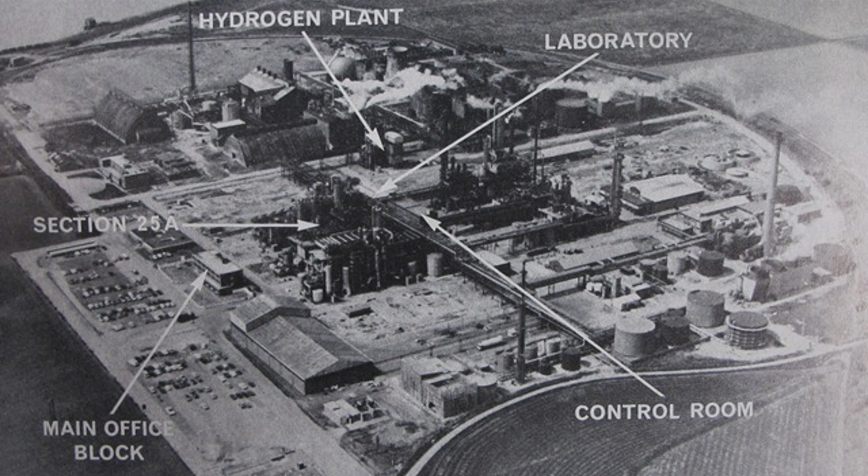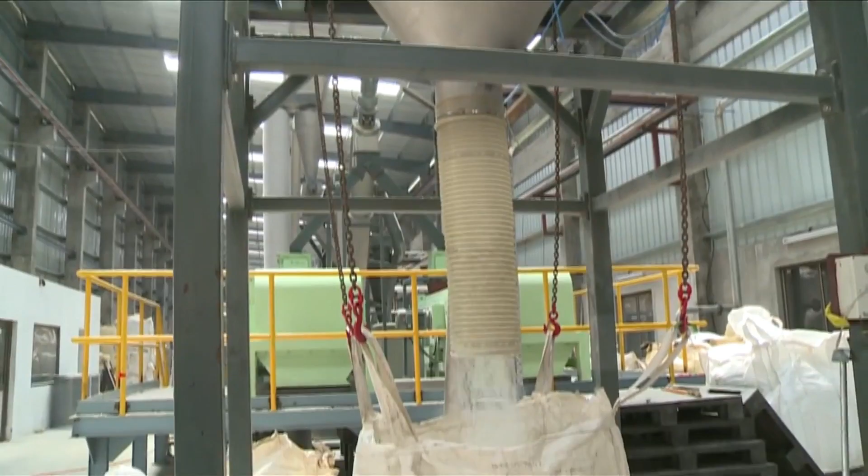A chemical plant had been on the site since 1938, originally owned by a company called Nitrogen Fertilisers Limited, a subsidiary of Fisons, and used to manufacture the fertiliser ammonium sulphate. In 1964, Nypro was formed, initially as a joint venture between Fisons and the Dutch Coal Board, but by the time of the accident, the Great Britain National Coal Board had also come on board, and the Dutch Coal Board had acquired Fisons' share. The chemical plant was reconfigured to produce caprolactam, one of the basic raw ingredients used for the production of nylon, and was the only plant in the United Kingdom to produce the material.

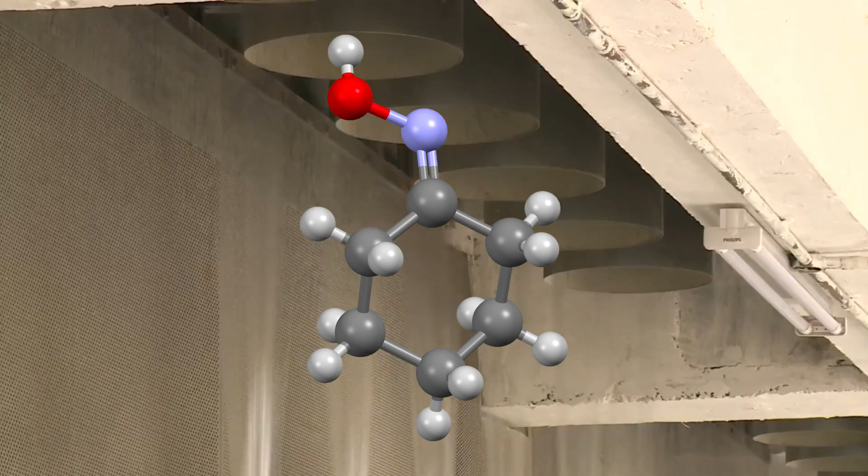The first stage of the process was the production of cyclohexanone, which was produced by the oxidation of cyclohexane, a highly flammable material in both liquid and vapour form.

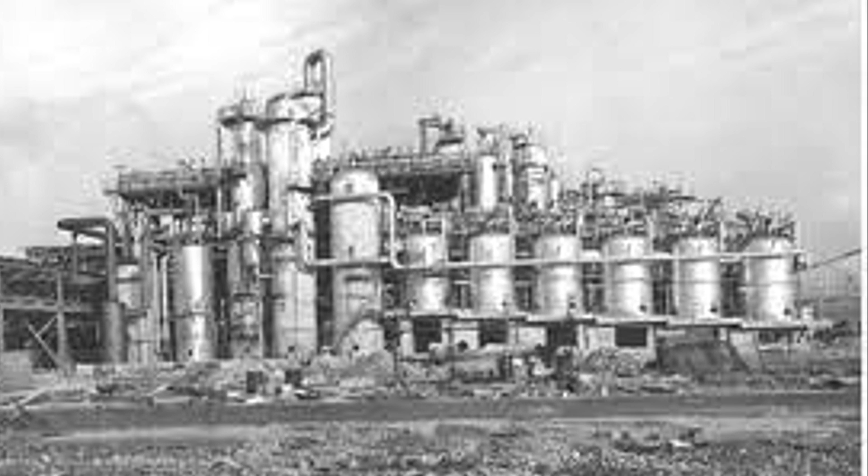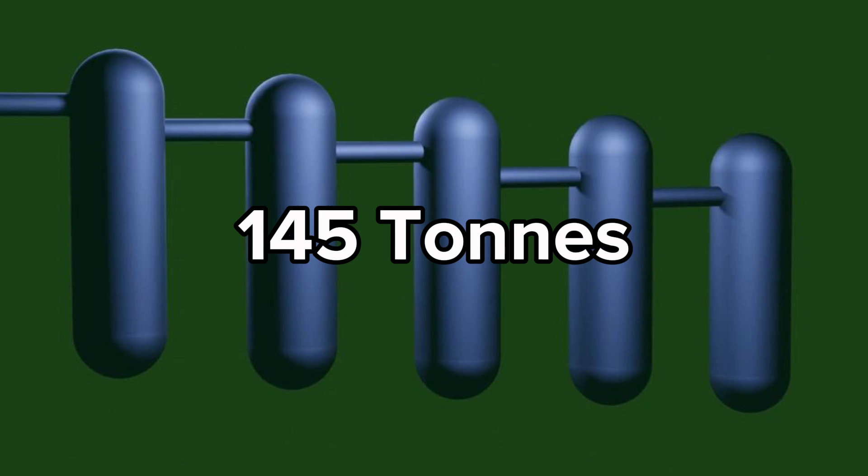The cyclohexane was heated to about 155 degrees centigrade before passing into a series of 6 reactors. The 6 reactors were each placed slightly lower than the previous to make use of gravity to assist with the flow of product through the reactors. The reactors were constructed from mild steel with a stainless steel lining, and when operating, they held in total about 145 tonnes of flammable liquid and a working pressure of 125 pounds per square inch.

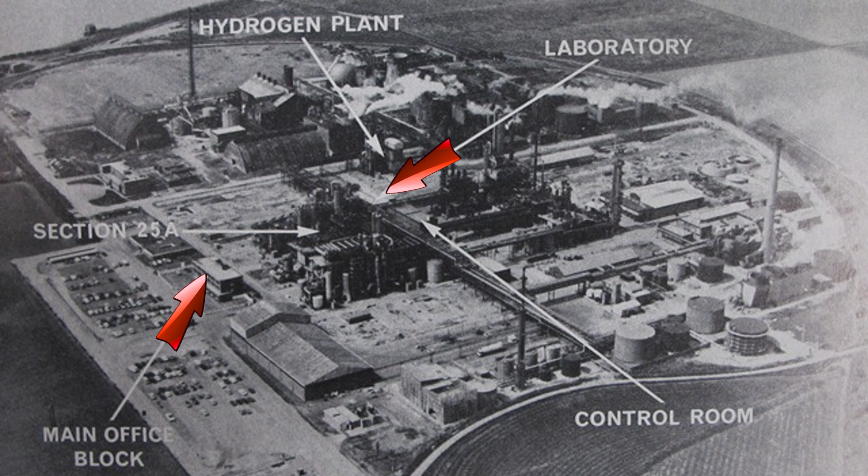The reactors were located in Section 25, which was located close to occupied buildings including the main office, laboratories and the control room. On 27th of March 1974, cyclohexane was discovered to be leaking from Reactor 5, and the plant was shut down and depressurised. The leak was found to be coming from a 6 feet long crack.

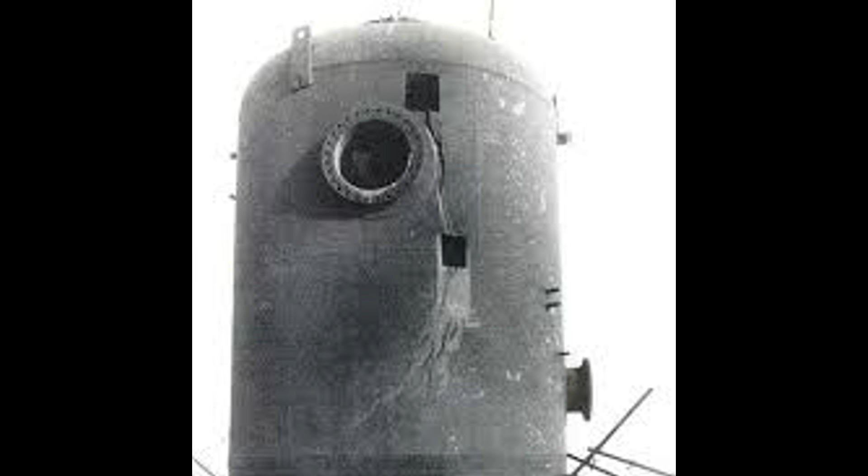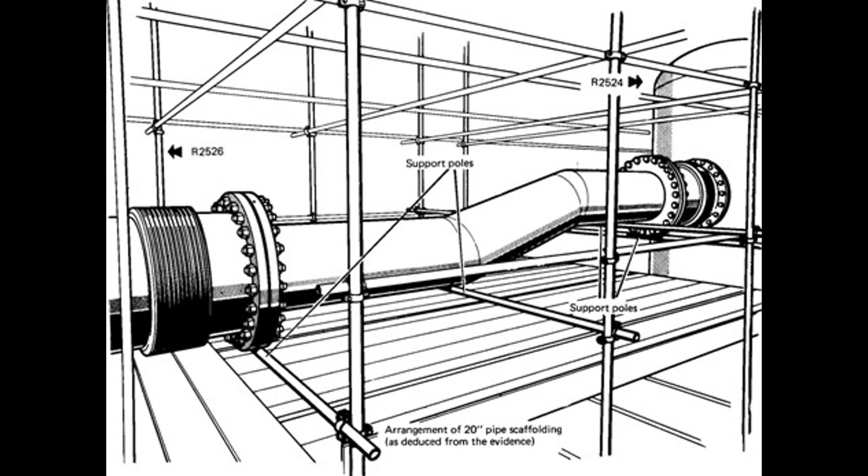A decision was made to remove Reactor 5 for further inspection and repair, and bypass the reactor. A bypass pipe was hastily constructed to connect reactors 4 and 6. The nozzles on the 2 reactors were 28-inch in diameter, but the only pipe available was a 20-inch pipe, which was used to create the bypass and included a dog leg and bellows.

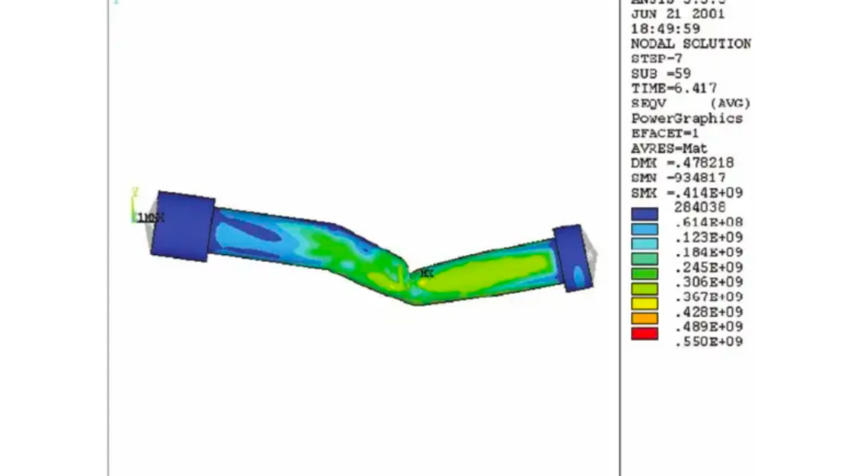While some simple calculations were conducted to determine that this pipe could take the working pressure and flow in the reactors, no calculations or allowance was made about the complicated geometry of the construction. No checks were made by a qualified engineer to the relevant British standard to check for the thrust on the dogleg section, which would cause the pipe to buckle.

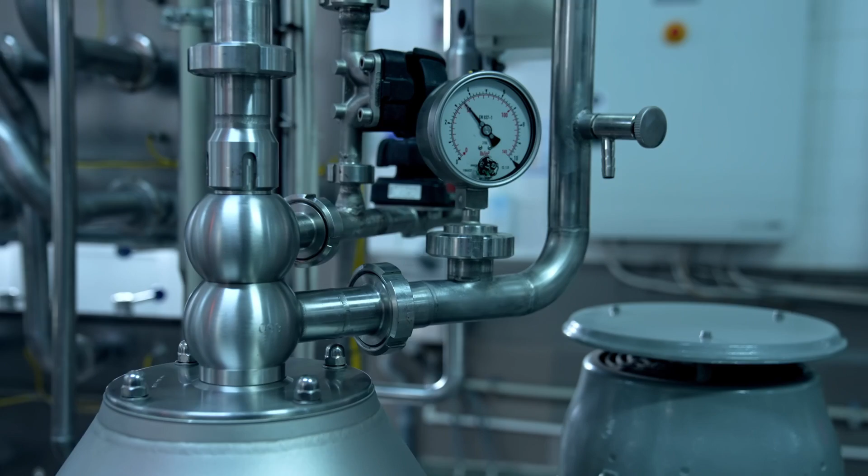The pipe section was leak tested with nitrogen, but not pressure tested to 1.3 times the operating pressure, which was standard at that time. Such a test is likely to have failed the pipework, and the incident would have been averted. The plant was brought back on stream on 1st of April 1974 and ran with no problems until 29th of May.

The plant was shut down for a couple of days. Then on 1st of June, the plant was brought back online again. The reaction ramped up gradually until, at about 4:53 p.m., a massive explosion occurred, which could be felt for miles around.

It was later estimated that it had the equivalent force of 15 to 45 tonnes of TNT, making it the largest peacetime explosion in the United Kingdom at that time, a record that has only been exceeded by the Buncefield explosion in 2005. The explosion devastated the chemical plant and also extended to nearby settlements.

Of the nearby villages, 72 of 79 houses in Flixborough were damaged, 73 of 77 houses in Amcotts, 644 of the 756 houses in the larger village of Burton upon Stather, and even 786 houses in the town of Scunthorpe 2 miles away were damaged.

But more seriously, the explosion also killed 28 people and seriously injured 36 more, of the 72 people who were on site at the time.

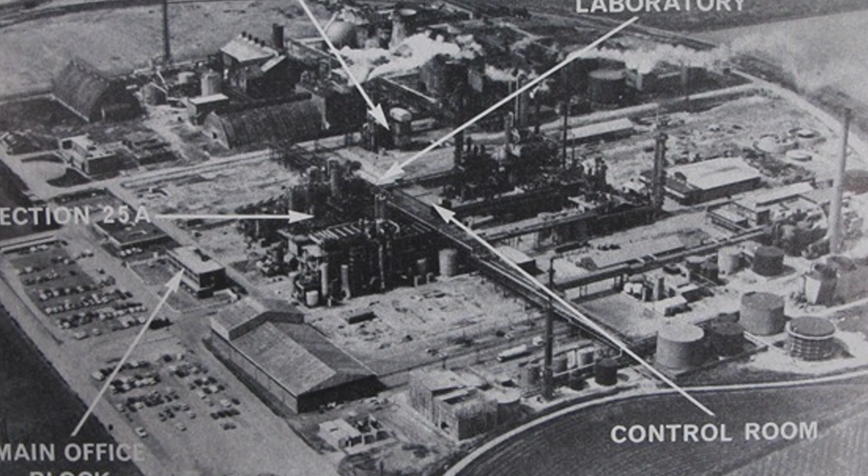The casualty figures could have been much higher if the explosion had occurred on a weekday, when the main office area would also have been occupied. 18 of the fatalities occurred in the control room as a result of the windows shattering and the collapse of the roof. No one escaped from that control room.

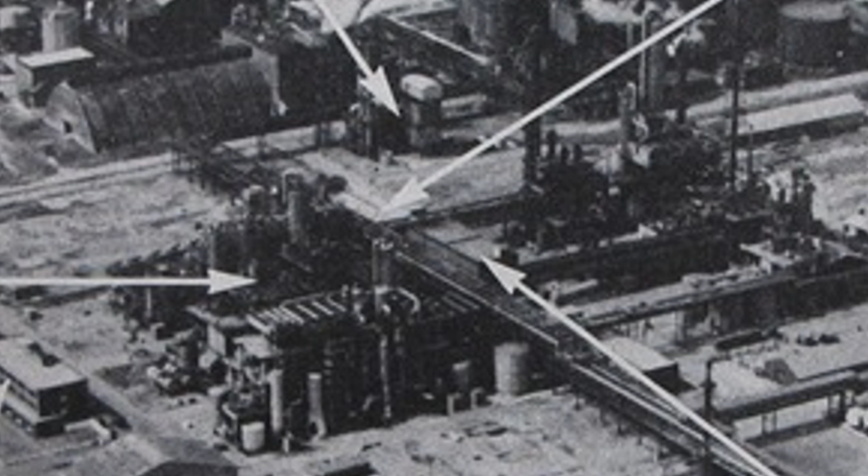Fortuitously, the occupants of the site's laboratory had seen the release when it started and evacuated the building before the gas cloud ignited. Most of them survived the blast. There were also 53 people injured off-site in the nearby villages.

It took the emergency services 10 days to bring the fires under control. Once the site had been made safe, the investigators were able to move into the site to conduct their investigations. They were met with scenes of devastation.

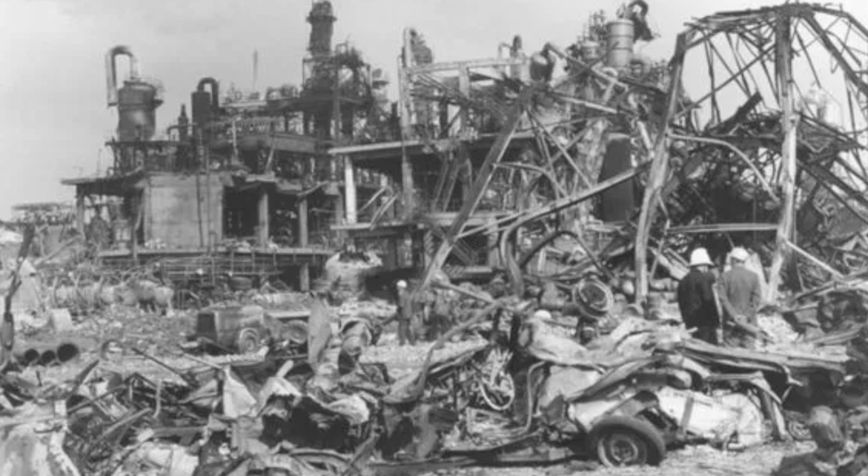It quickly became apparent that the source of the explosion was centred on the Section 25A module, and a court of inquiry was established to determine the cause of the accident, led by the QC Sir Roger Parker. The inquiry examined two potential sources of the release which led to the massive explosion.

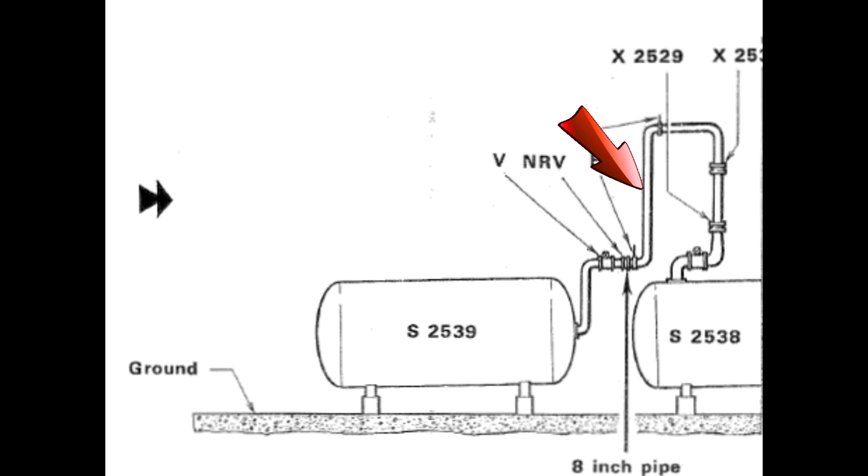One potential hypothesis centred around a 50-inch split in an 8-inch stainless steel pipe joining separators S2538 and S2539. But the Court of Inquiry dismissed this theory in favour of the much more likely failure of the 20-inch bypass pipework between reactors 4 and 6.

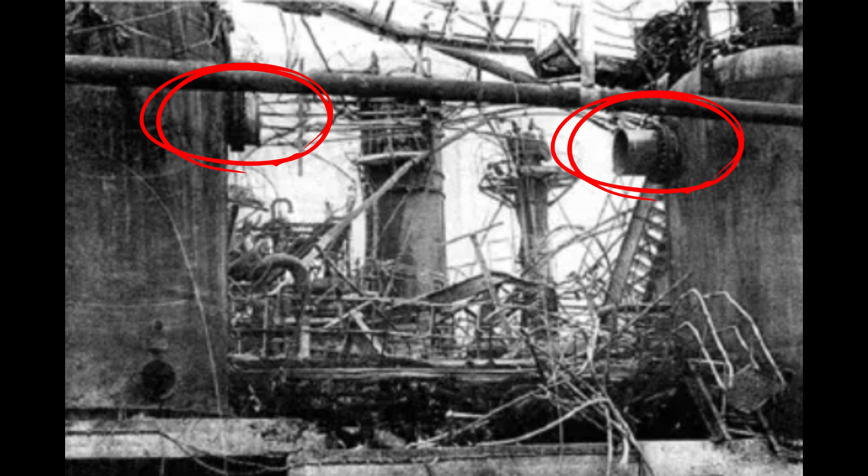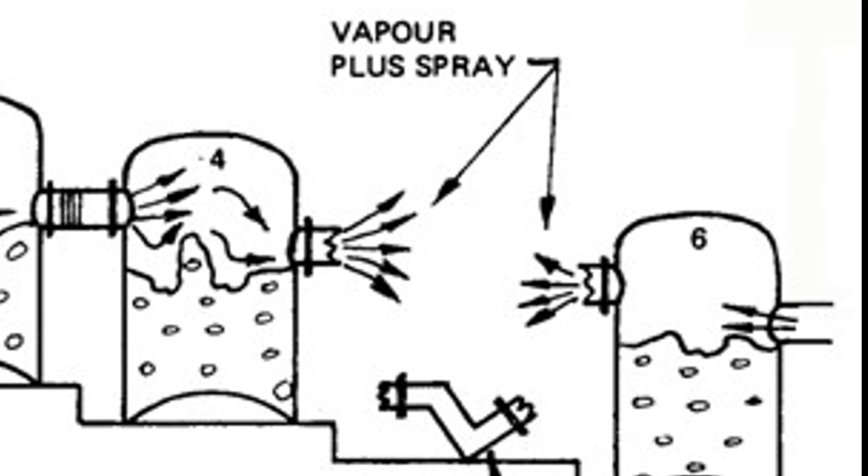The 20-inch pipework with bellows at each end had been torn away from reactors 4 and 6 and found on the plinth below the reactors. The nozzles on reactors 4 and 6 were open-ended, which would have allowed a large release consistent with that required to generate such a large explosion.

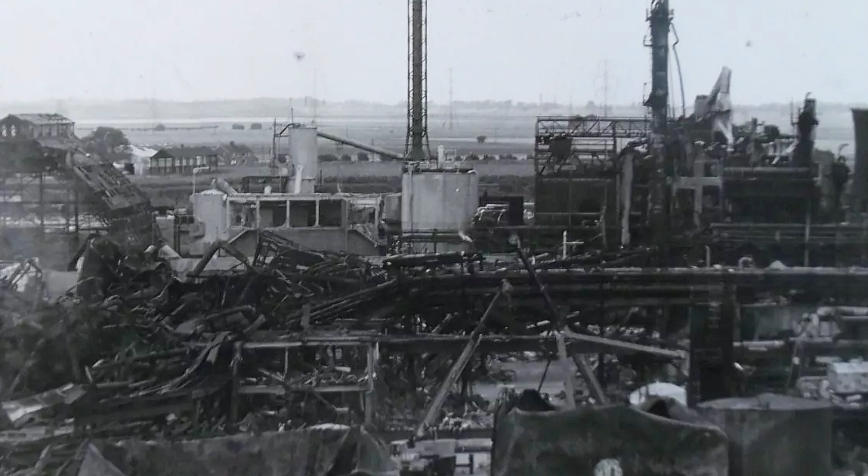The epicentre of the explosion was estimated to have occurred northwest of Section 25, where the hydrogen plant was situated. The inquiry concluded that no one appreciated that the pressurised assembly would be subject to a turning moment imposing shear forces on the bellows for which they are not designed.

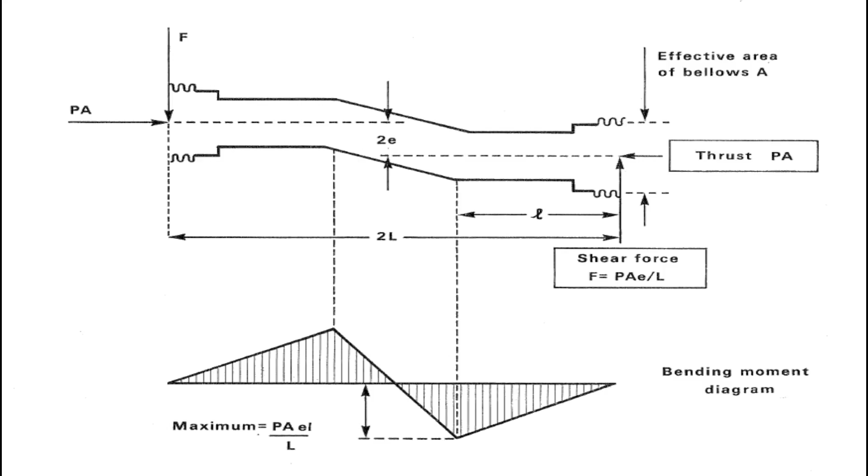Nor did anyone appreciate that the hydraulic thrust on the bellows, some 38 tons at working pressure, would tend to make the pipe buckle at the mitre joints.

As one contemporary campaigner on process safety wrote following the accident, the shock waves rattled the confidence of every chemical engineer in the country. The accident highlighted the major accident potential of chemical plants. It also highlighted the importance of proper management of change processes and procedures.

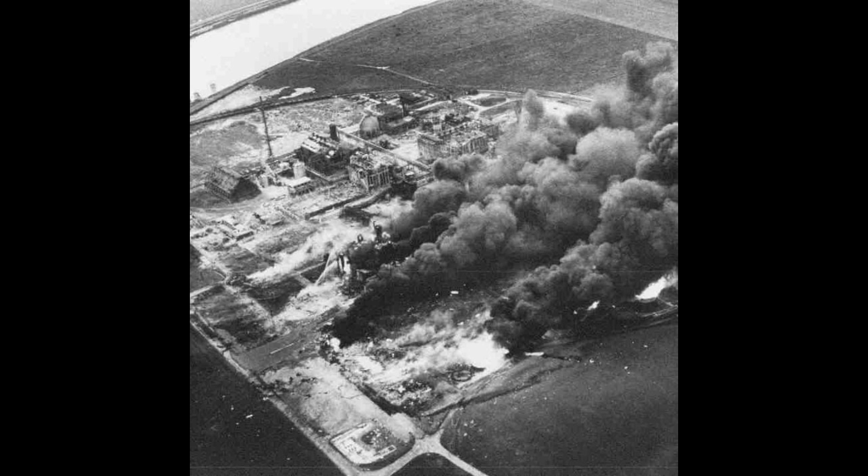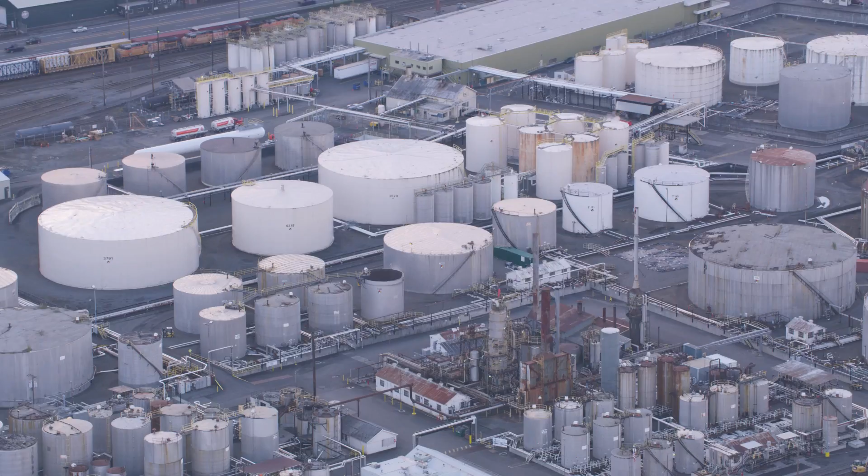Major hazards regulation changed considerably over the following years. Flixborough, along with other European accidents such as the Seveso disaster in 1976, which triggered the European Union Seveso Directive in 1982, led to better regulations, and ultimately to the Control of Major Accident Hazards Regulations, or COMAH, in Great Britain. There is also better scrutiny of the siting and location of both buildings on chemical plants, and of chemical plants themselves away from population centres.

1974 was also a groundbreaking year for other health and safety legislation, as the Health and Safety at Work Act 1974 was introduced in Great Britain. And since its introduction, it has made Britain one of the safest countries in the world to work in.

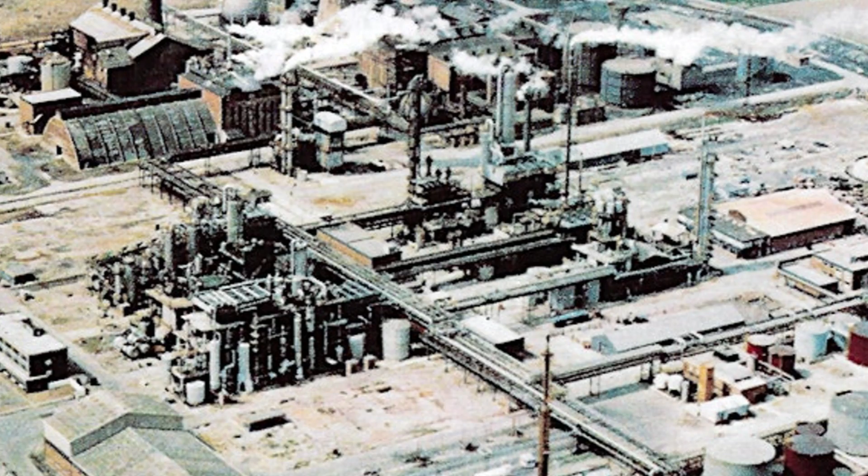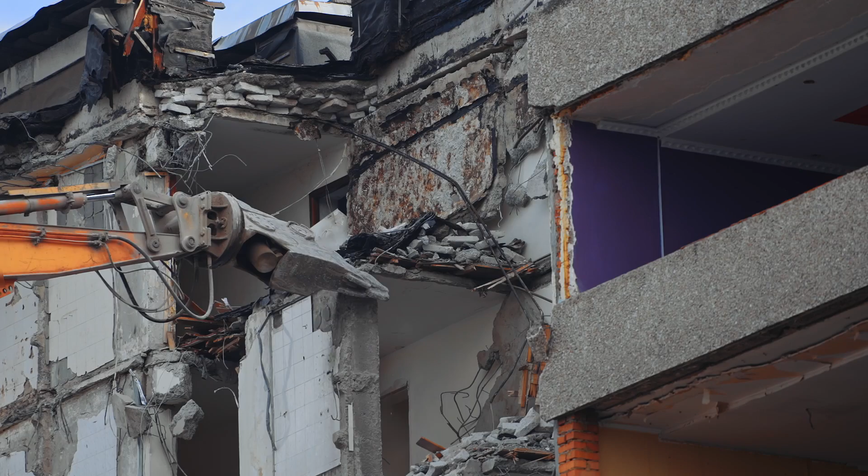The plant was rebuilt after the accident, using a modified process, but only ran for several years after the accident, and eventually the whole site was demolished in 1981. 50 years later, there is no sign of the chemical plant, and the site is now home to an industrial estate. A memorial to those who died was erected in front of the offices at the rebuilt site in 1977.

Cast in bronze, it showed mallards alighting on water. When the plant was closed, the statue was moved to the pond at the parish church in Flixborough, but during the early hours of New Year's Day in 1984, the sculpture was stolen. It has never been recovered, but the plinth it stood on, with a plaque listing all of those who died on that day, can still be found outside of the church.

And there you have it, the story of the Flixborough disaster.